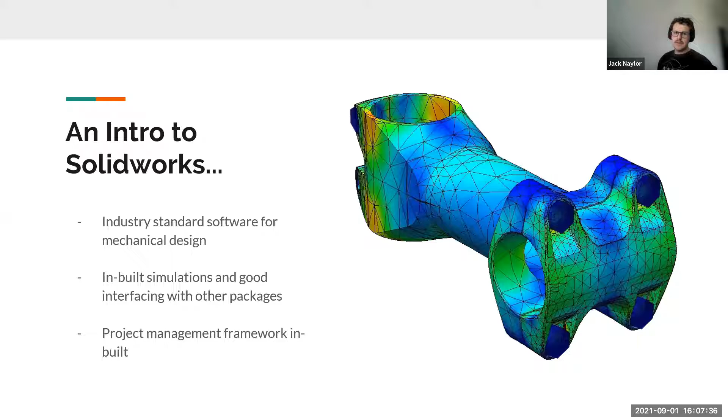Why do we use it? Why do we use SolidWorks over other forms of software? SolidWorks is a pretty good industry standard software for mech design. It's got some good inbuilt simulation and good interfacing with other packages as well. There's also a project management framework inbuilt to it as well. So SolidWorks is pretty widely used in that regard for doing CAD out in the workforce.

Just check chat. Cool.

So with SolidWorks, you're able to produce not only 3D parts, but also 2D engineering drawings. And that's pretty important in order to be able to make things; most manufacturers work off the 2D drawings. There's lots of toolboxes for plastics, sheet metal, computer-aided manufacturing, electrical routing, pipes, and all that other funky stuff that is quite hard to do by hand. So having a CAD program to do it for you is a really nice way of doing it.

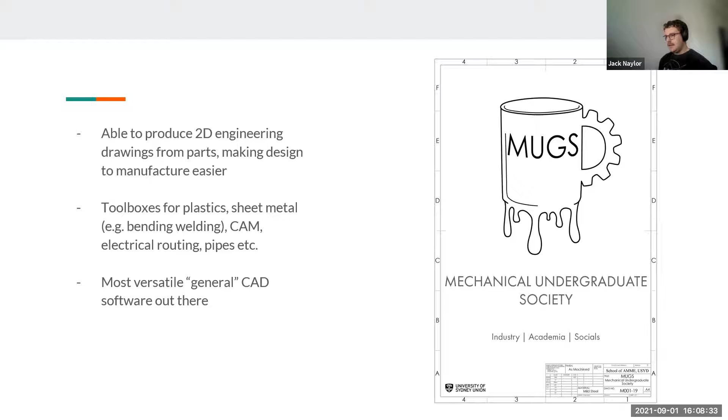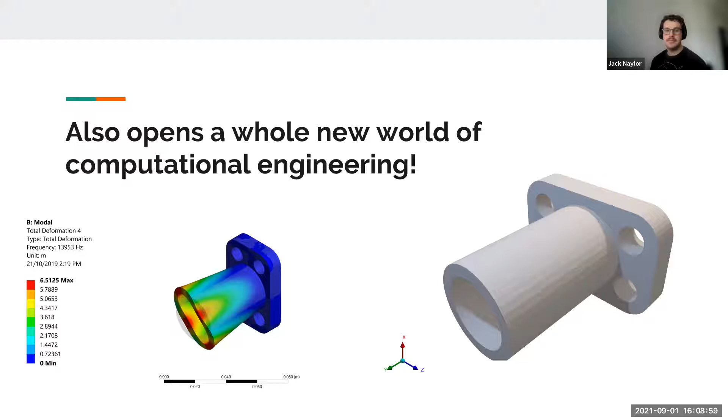I'd say it's probably one of the most versatile general CAD programs out there, but there's certainly some more specialized ones as well that are worth looking into. The other thing as well is it opens up a whole new world of computational engineering. So here we've got, for example, a part that I've made in SolidWorks, and then I've taken it over to a program called ANSYS that you'll end up learning in future years in engineering. In this particular case, it's showing off a modal deformation plot, but you can have it do all sorts of other things as well.

One of which is topology optimization, which is a really key and up and coming area. It's based on this idea that you start off with an original design and then you use optimization methods to go through and tear little bits of it off that aren't really helping the structural integrity of it. In this particular case, we have a funny angle bracket here with two holes in it. We load it with some forces on these two points. We run it through ANSYS and it actually generates a whole new model for us.

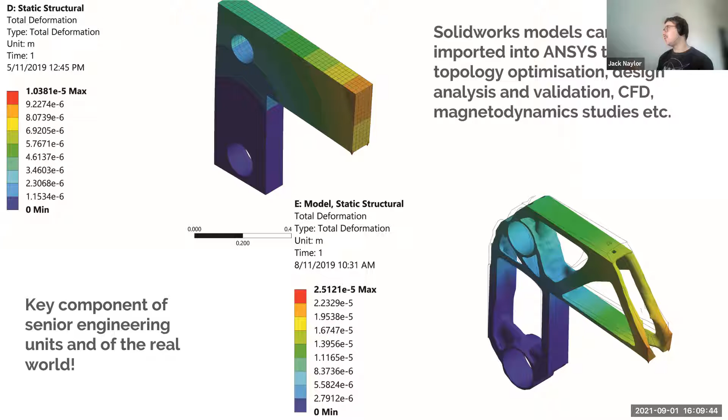So being able to design something rough initially, chuck it into one of these programs and then have it spit out a new model for us to use that we can then re-interface with other parts is actually quite important. And it's definitely where mechanical engineering is progressing towards in terms of actual product design and manufacture. Okay, so that's a broad overview about what SolidWorks can do, why it interfaces with other parts really well, and why that's important.

The next thing that we actually move into, and this is the core section of this presentation, is looking at what SolidWorks actually does to be able to build up a model. Having a fundamental understanding of this is a pretty key thing, and it will help you generate models going forward. So this idea of additive versus subtractive modeling. In order to build up a model, do we add bits of material to it or do we subtract that material?

And this is quite important when you're looking to build parts that actually need to be manufactured. The reason why it's important is the manufacturing techniques that we actually use in the real world look at both of these things. So for example, 3D printing is an additive process. We have a bed that moves around and a nozzle deposits bits of material, so it actually adds up to be able to build a structure.

Milling, on the other hand, is subtractive. You start off with a chunk of metal, it goes around with a cutter and gets rid of that material. Having an understanding of how those two are different and specifically targeting your design for one or the other can make it a whole lot easier to actually generate those parts.

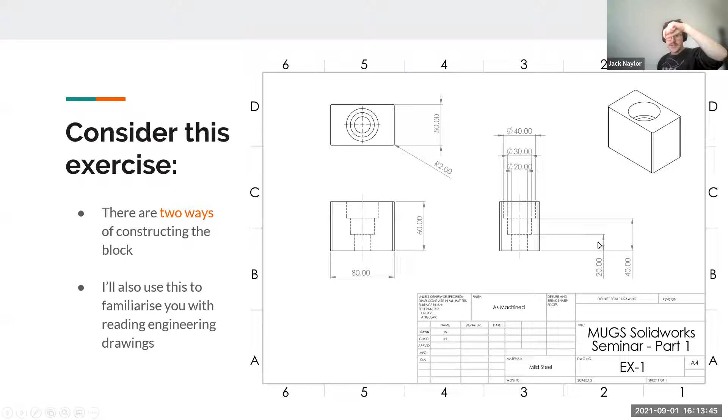And what I would do there is I would start off with a plane on the bottom. I'd build up this first layer here with that one hole in it up to 20 millimeters. Then I would start drawing on that next surface another rectangle with a hole in the center of it that's slightly larger, build that up to the next layer, and then build the third layer on top of that. That would be totally additive. I haven't done any subtractive processes. The issue there, of course, is that's kind of an unintuitive way to do it.

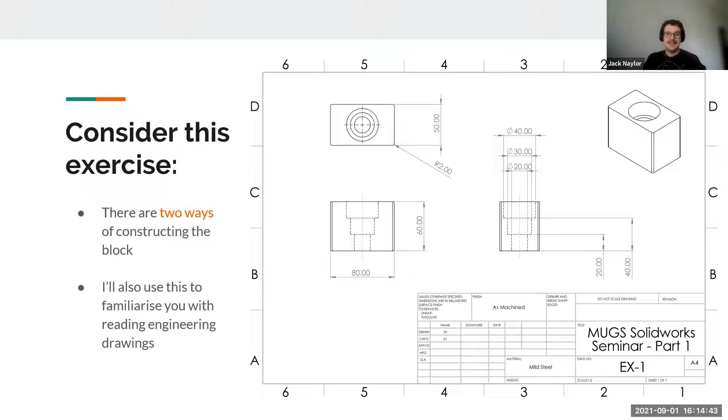The other way you could do it is you start off with a block, and this is the way that you probably would go about doing it. Start off with a block that's 80 by 60, and then you start subtracting out progressively these circles, going down with thinner and thinner diameters. And that would be a subtractive modeling approach to it. Obviously, that's probably much more natural to you. If you wanted to build this in the real world, that's the way you'd do it. You have a block of metal, you drill progressively down to take the material out. But yeah, that shows the two approaches that I'm talking about here, additive and subtractive modeling.

Another key thing that you should be thinking about is, what do I need to consider before I go about actually starting a model? Where do I start with this? So the first thing I would say that you should do is make a bit of a game plan as to how you're going to approach it, how you're going to start building it up and getting to that final product. So do you want to start with a block and remove material as we did in the previous example, or start with a base sketch and build things onto it? They're the things that you should be considering.

The other thing that you want to do is get a bit of an idea for the proportions of the part. So you'll have a drawing in front of you. It might have a range of holes in it and fillets and all sorts of other things, but getting an idea for how big they should actually be in relation to the other parts is quite important as well. It gives you this intuitive check as to whether what you're actually building is indicative of the real thing.

The other thing that you should do as well, and this is something I want to stress, is you should look for symmetry in your part. CAD programs allow you to mirror things, and this makes your job much, much easier than it would be having to go through and build everything in a model. If you can see a line of symmetry in your part, well, that's going to be a whole lot easier for you to actually build up.

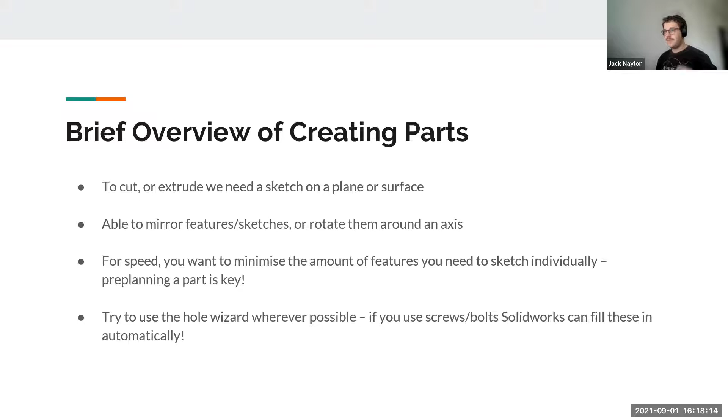The other thing is when you have holes in your parts, you want to use the hole wizard wherever possible. And the reason for this is SolidWorks is able to fill those holes in with screws and bolts. And that makes your job a whole lot easier. If you go through and want to generate a bill of materials for your part, it can actually put in how many screws you want in the end. And it just makes it a lot easier when you go to building assemblies, having it kind of rooted in the real world with what the fixtures you would use would be.

Something that's quite key that I think anyone that is new to SolidWorks should be aware of is this concept of reference geometry. This is here to make your job a hell of a lot easier. It basically allows you to start creating features off of surfaces to join later. So you can apply geometrical constraints and use them as your kind of baseline. So you can create a plane that's 10 mil off a surface and start sketching on that to extrude down, for example.

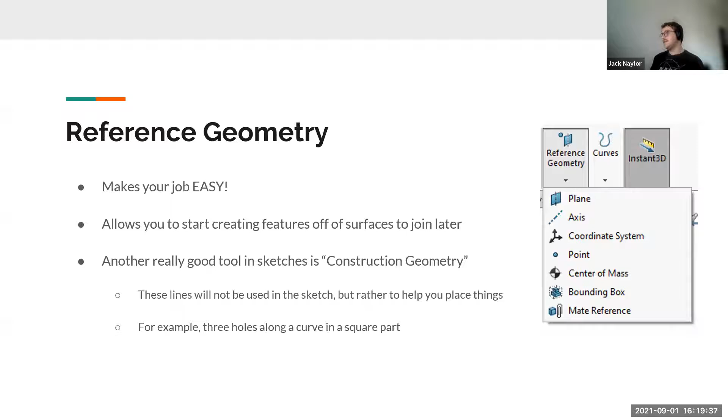The other really good thing is this idea of construction geometry as well. So when you're in a sketch, you start drawing up the geometry that you actually want to use as a component of that sketch, but you can also lay out other parts of geometry that are just there to help you construct and place things as well. Now, what do I mean by that? Well, these could be 3 holes on a square part, each a radius from one of the corners. So in this case, I have my 3 holes here. I've drawn them and you can see that they're this solid black color. And that indicates that they're actual sketch features.

But I've also then clicked on my arc here that I've drawn from this point at a radius. And I've clicked this box called for construction. Now, what this means is when I go through and start either extruding or cutting these holes, they're the only things that SolidWorks will actually see as features for the part. It'll ignore having to cut through that line or whatever. That for construction line is just for construction. It doesn't actually go through to the real part. So being aware of that and using that to your advantage is quite important.

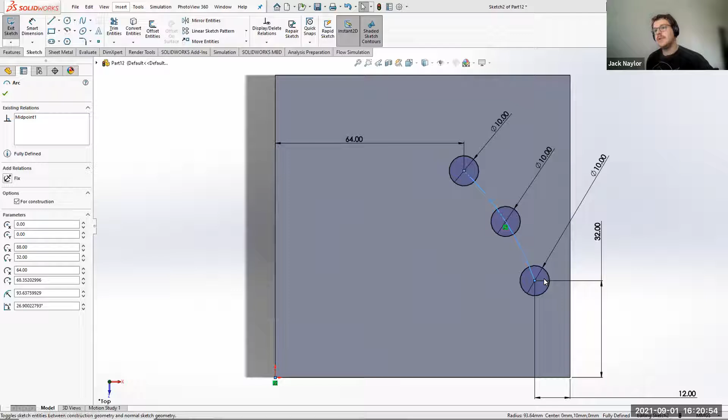You can see that with a lot of the constraints that I've put here, I'm able to fully constrain this middle circle by only dimensioning these 2 outer circles. And I talk about what fully constrained sketch geometry looks like in a moment's time. The other thing you can do is, rather than just having a 1D piece of geometry, as I had in that arc before, you can have a 2D piece of geometry.

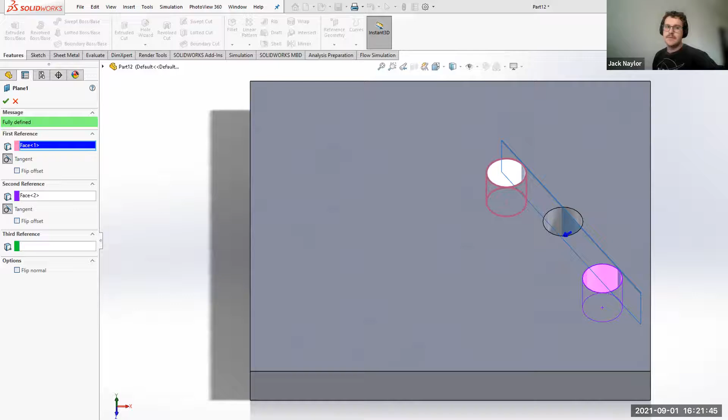So in this case, I've actually put a plane that is tangent to these two holes in my plate, but cuts through this third one. And how have I done that? Well, I've said to SolidWorks, I want to input a plane here. I want it to be tangent to the first one, and it goes, okay, cool. And then it goes, all right, where's the second reference, the second face of this hole? It's also tangent there. And so it can fully constrain that plane to be tangent to both of those. And that's kind of an indication of a more 3D version of construction geometry, reference geometry rather.

I mentioned a moment ago about sketches needing to be fully constrained. Now, what do I mean by this? Well, SolidWorks is only able to do what you tell it to do. If it doesn't have enough information, it's not really sure where you want to place something. So there's three types of sketch definitions. There's under defined, which is when something is blue. There's fully defined, which is when it goes black. And there's overdefined. And there's two sorts of overdefined. Red, which is unsolvable. You've given sets of geometry to SolidWorks that it just can't solve, and yellow, which is

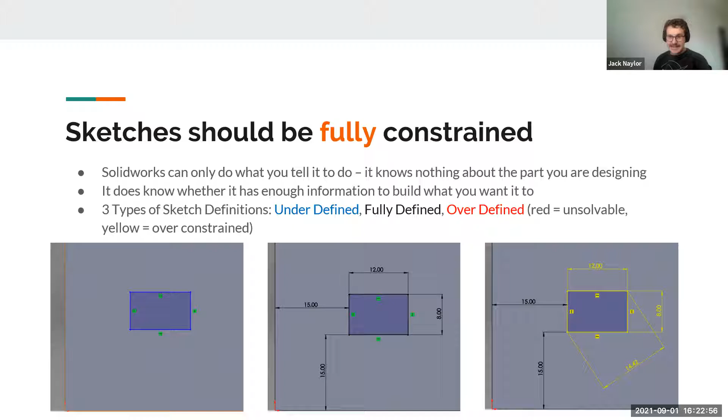overconstrained. So an indication of overconstrained that I have on the screen here is a rectangle that I've put in. I've dimensioned both its sides, but then I've dimensioned this diagonal. And so it's not really sure which one it should pay attention to, whether it should look at this top side here or the diagonal in that case. And the good thing is, because they're different colors, you can work out where they are pretty easily and go about correcting them by deleting dimensions or adding new ones in to fully define.

Another thing is geometrical relations. And we'll get to this when we do an example in a second. Now, geometrical relations are inside of a sketch part, and they're indicated by these little green boxes here. These are really, really handy, and it allows you to relate parts of geometry in your sketch to one another. So in this case, this vertical line has a symbol that it's vertical. This horizontal line has a symbol that it's horizontal. And what that means is SolidWorks knows that that line is constrained to that horizontal fashion or that vertical fashion.

You can also add things like coincident, where you have a line intersect another curve. It creates a point that is coincident on that curve. You've then also got tangent constraints. So you have a line that is tangent to a circle. And you've also got things that SolidWorks might generate automatically for you, like a midpoint constraint. So if you click to put a line between the center point of this edge and that circle, it'll add a midpoint constraint automatically, and also things like a rotational symmetry. So there's quite a few of those inbuilt, and they're really, really handy. We'll kind of show them off in a second.

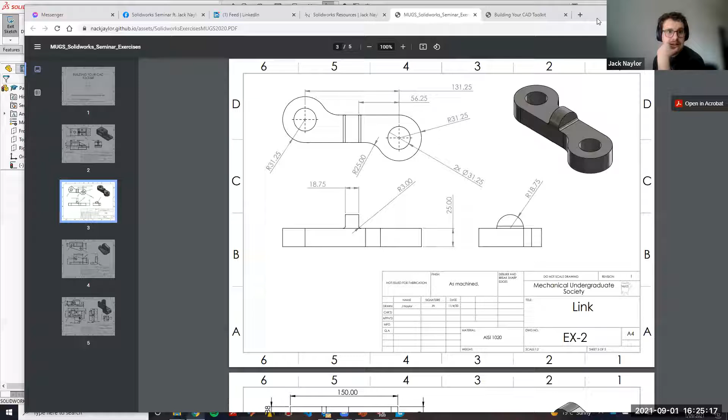There's a PDF there. We're going to actually go through, and I'm going to give a live demonstration of how we actually would go about making a part by looking at some of these constraints. And you guys are welcome to follow along in the background as well. So just give me a moment to exit out of that and bring up my dimensions on this screen. So I suppose first thing to do is to look at what the actual drawing is showing us here.

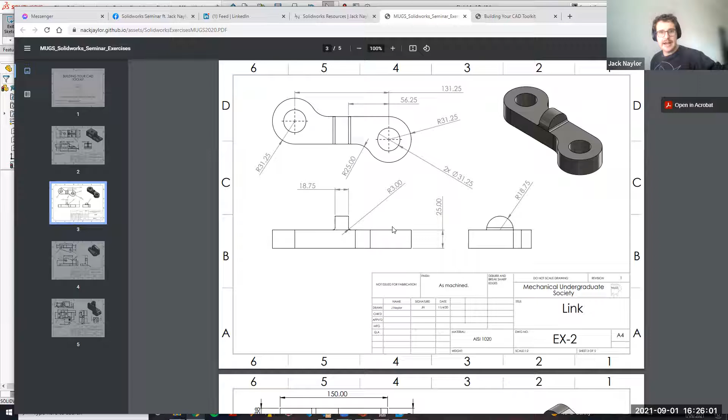Okay, so we've got this funny looking part. We've noticed that there's a number of dimensions here. So when I'm talking about pre-planning, I'm thinking, okay, that's probably a good base point to center everything to start off from, because I know that I can constrain a number of my features around that. We've also got this funny bump on top that looks like it needs to be constrained from the horizontal side. So I probably need to put in some reference geometry to be able to do that, probably in the form of a vertical plane that I offset. And that's obviously got a radius that corresponds to that width. So that's something to be aware of as well.

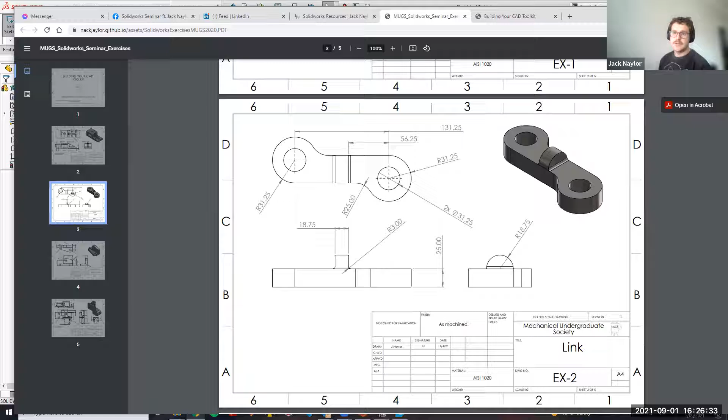And a couple of fillets as well around the part. So these are all things that you've got to be aware of. But I think this center point here is definitely a good place to start. And I notice that this entire profile I can probably do in one sketch entity. I don't need to go through and do multiple sorts of features. So, okay, let's have a go at that now. I've already got that center circle put into place. And I note that that's going to be a diameter of 31.25, like so.

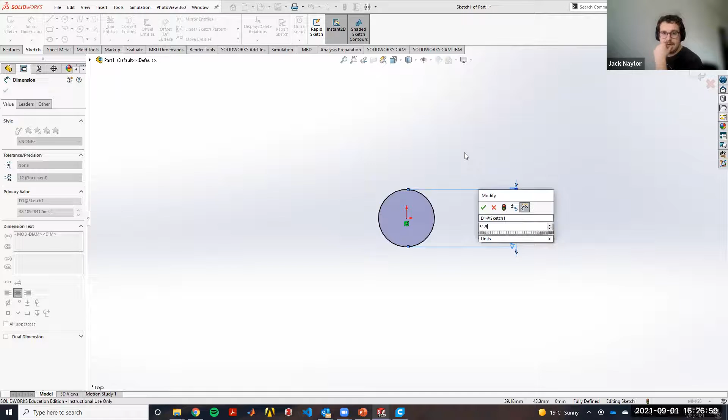And wait for this to load. Okay, 31.5. All right, so there's that first circle in.

The next thing I want to do is put another circle around it, corresponding to the wider part of that chain link. So let's go ahead and add another circle in.

Now this one needs a radius dimension, and I can dimension from here out to there, like so. Oh, interesting, it won't let me. It's all right.

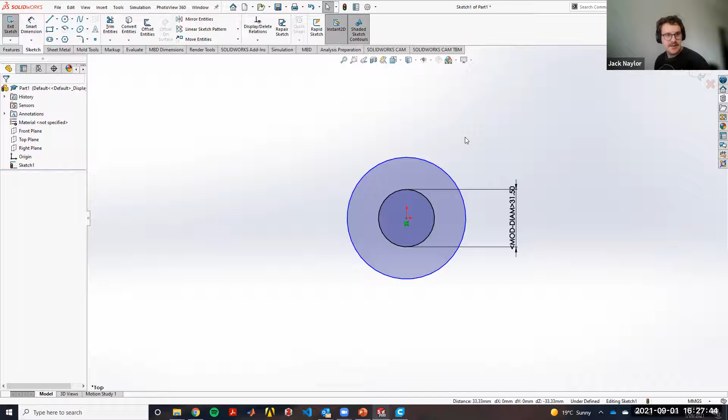It's okay, we'll click off the circle once more. Okay, that's worked that time. You'll probably see that I'm not actually clicking this dimension button. In my case, I've bound the dimension button to the D key on my keyboard, which I think is quite intuitive, but it's certainly personal preference. You can keep clicking up to the dimension in your case.

So in this case, that circle has a radius of 31.25. Times that by 2, that's going to be 62.5. Last time I did maths. Wait for that to load.

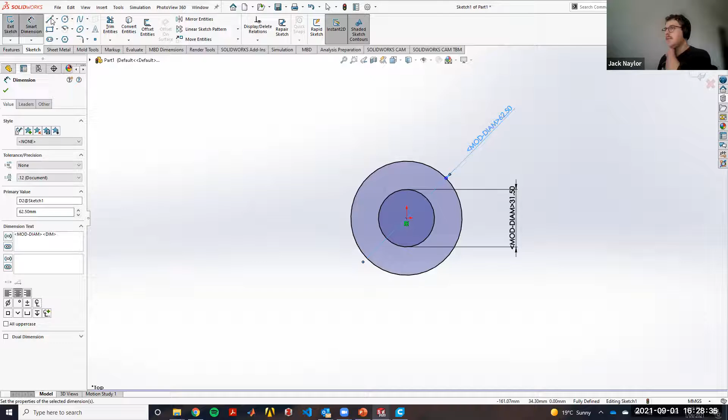And the next thing we want to be looking at is that top horizontal line. So we'll click the line. Now we know that's going to be tangent.

So I want to come down here. I'm going to click the top of my circle and create a horizontal line like so. That's going to come across.

And then I also want another line beneath it. Let's go about, and this one is not going to be tangent, it's going to be horizontal.

So this is where we might want to add in one of our constraints. You'll see that SolidWorks is clicking here to that horizontal constraint. If it doesn't, you can always go over to the side and click on the line and add in that horizontal relation. But in this case, it's done it for me.

Okay, that's our left section almost done, not quite there yet. The next thing we want to do is start getting the circle going on the other side over here. So let's draw a circle.

Our inner circle is going to be a diameter of 31.25 again. We'll come down, dimension that, 31.25.

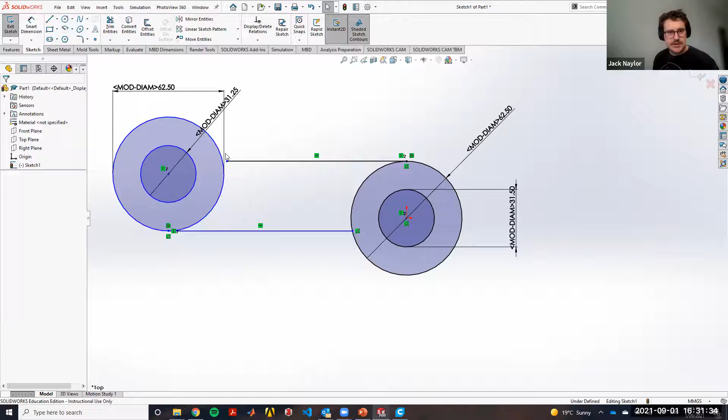What we now want to do is drag this such that it's coincident onto that curve, which is just done there. We also want to drag this one across a little more, and that will also add in a coincident constraint.

So, okay, this is now taking shape. The next thing we want to do is dimension where the center of this circle is relative to this first one. So let's go ahead and do that. I want to click the center of this circle and the center of this circle, like so. And that gives me a dimension between those two.

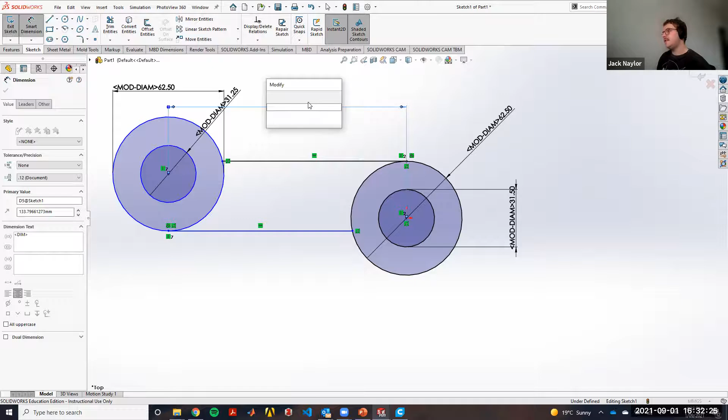And I should now be able to edit that dimension, which in this case is 131.5 millimeters. All right, that's now brought that in slightly.

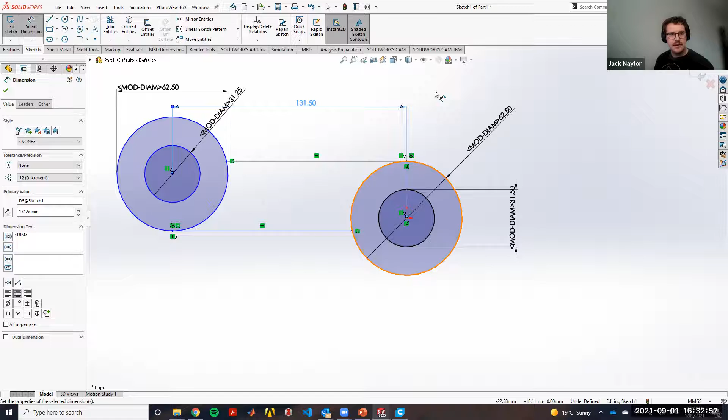The next thing we want to look at is adding in the radius between my left hand circle here and this line, and between my bottom line and my curve here. So I think from memory, the way we go about doing that is adding in a sketch fillet.

And I want to hold Control, Enter, or click between these two. Oh, hang on, no, I think I need to click this.

Oh, great. That's all right. We'll add the fillets later.

The next thing we want to do is apply the width here, which is a radius of 18.75 times 2 - handy thing to have is a calculator, of course. 18.75 times 2 is 37.5.

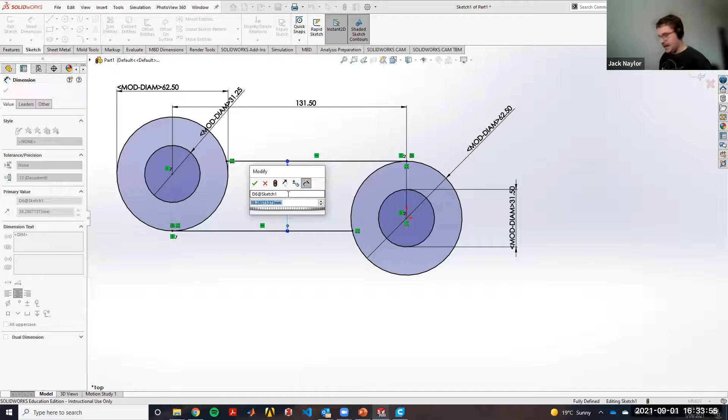Okay, we've now got our rough shape pretty much, bar our fillets there, but I think I can do them later. The next thing we can do is trim some unnecessary parts here, and that gives us the rough shape of our linkage.

All right, so now we've made our sketch. The next thing we want to do is go through and make this into a feature. So in order to do that, I'm going to be extruding it, building up my part.

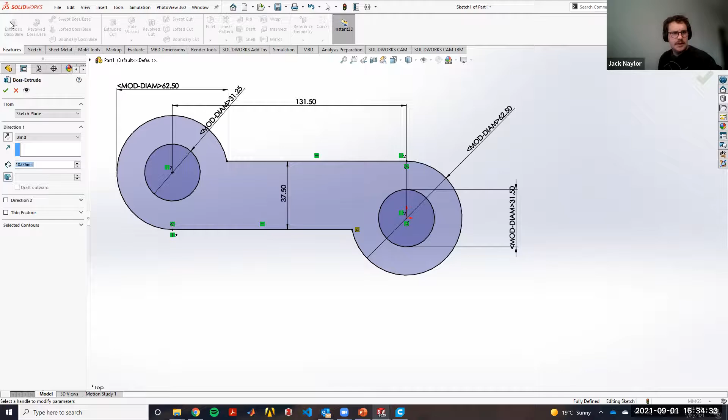I open this. It's already selected the largest area for me, which is nice. And I want to extrude that blindly up by 25 millimeters. So that's doing that just there.

Okay, so now we've got our linkage there. I'll try and add those fillets in for the moment. So they're 25 millimeters, I believe.

I can click that line in there, and then this line in here. And that's going to add in both of those curves, like so.

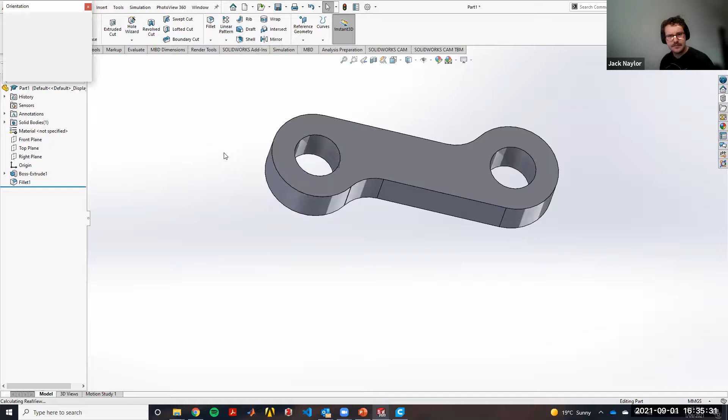The next thing we want to do is add that funny bump on top of our linkage. Now, in order to do that, this is where we're going to need to use some reference geometry. So let me just rearrange my view slightly.

In order to add in reference geometry, we come up top here, we click plane in our case. Now, I kind of made this easy on myself because I chose to start that first hole at the origin of my part. So what that means is that my right plane actually cuts through my part, which is quite nice.

So in this case, I need to make sure that my little bump is 56.25 millimeters in that direction. So what I can do is I can basically put a plane there that I can start drawing on. So in this case, 56.25 - this is currently going in the opposite direction.

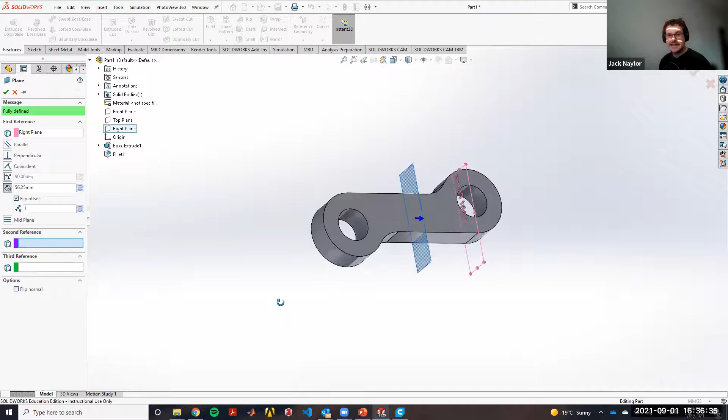What I can do is flip that offset and it will put a plane in the very center of my part, right where that bump needs to be. Okay, let's add that plane there. So our plane is sitting there nicely, make that a little larger.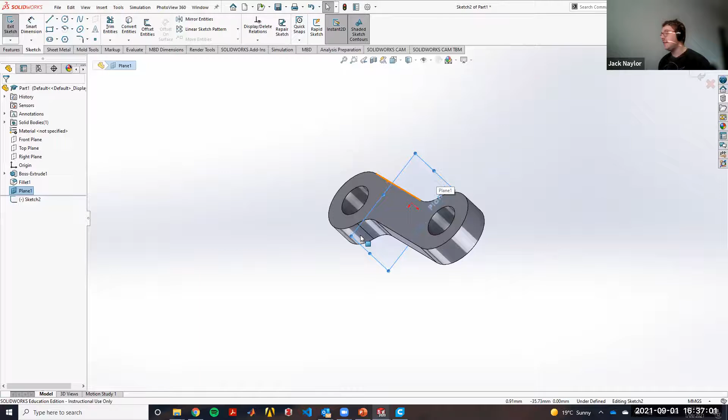Then the only thing we need to do now is add a semicircle. So we're going to click sketch, and I clicked on the plane before, and that means that my sketch is automatically entered to be on that plane. And now I can switch to an end view, sit over here, and just add in a semicircle.

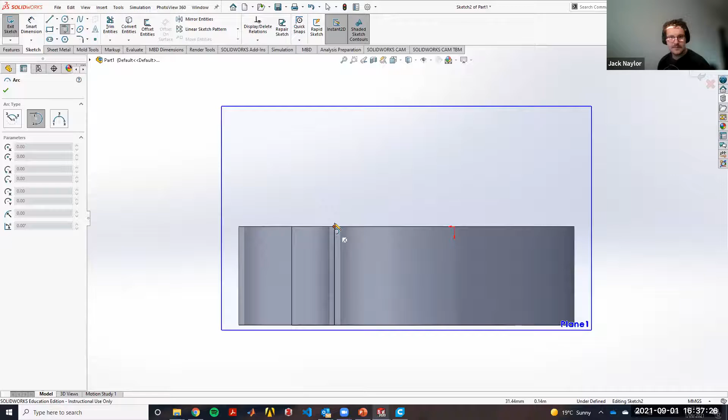So the way I'm going to do that is I'm not going to do a center point arc. I think I'm going to do a tangent arc. I'm going to click here. Oh. Actually,

let's do it via a circle. That might be slightly easier. Oh, why is that? Okay, now we've got a circle. Cool. Draw that out like so.

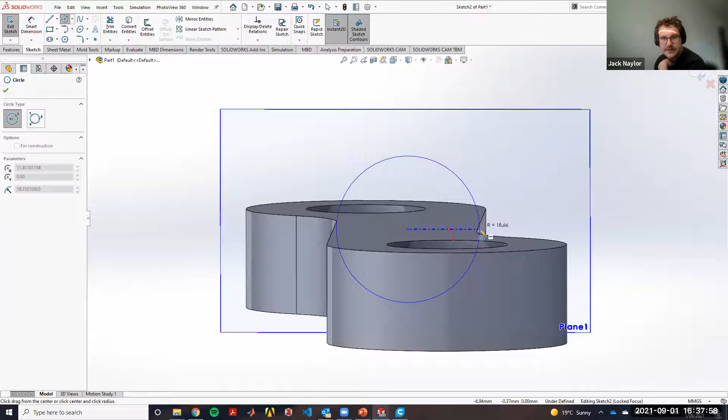Now, in order to dimension it, select that end part once more. And you notice that it's slightly off. So what we can do is add some constraints in.

I'm going to click the outside of my circle. Then I want to click this line of my part, hit Control. And the other thing you need to do is click this surface and do what's known as convert entities.

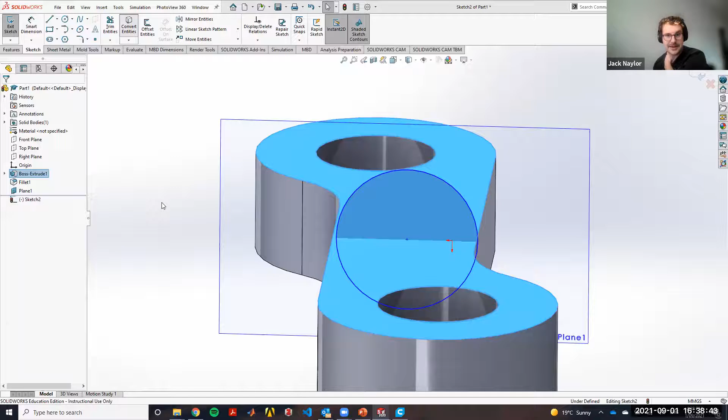And what that does is it takes, oh, that's annoying. I said to Nick before that it would get up to this point and things wouldn't work for me. That's all right. I know what this needs to be.

That needs to be a radius of 18.75. So if it's a radius of 18.75, it's a diameter of 37.5. Like so.

We can put in a line that goes from this edge here using a coincident constraint over to this other edge here, like so.

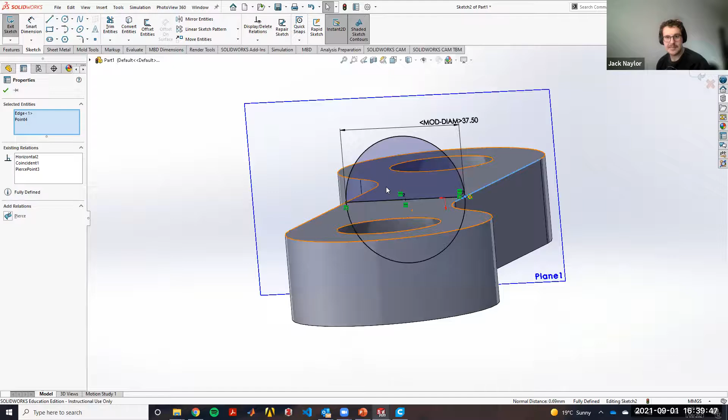Click that point and that line and add a pierce constraint, and that's now fully constrained. So my semicircle is now sitting where it needs to be. The next thing we can do is trim the bottom of our semicircle because we don't need it anymore.

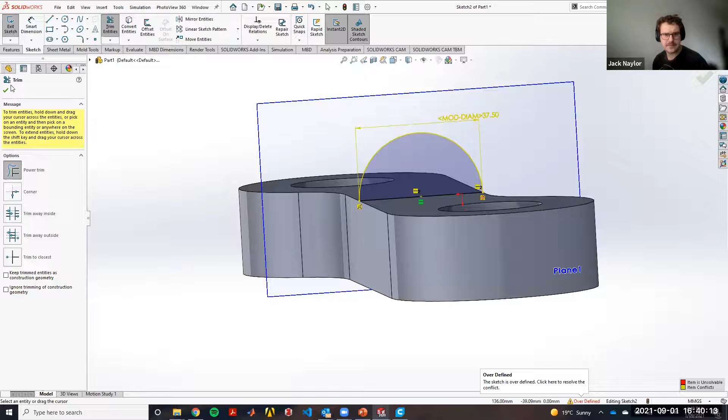So go to trim entities, go there, and our sketch is now over defined. Okay, so that's all good. We can just remove that dimension like so, and now our sketch is happy. You'll notice that we've defined that now without actually having to add any dimensions in.

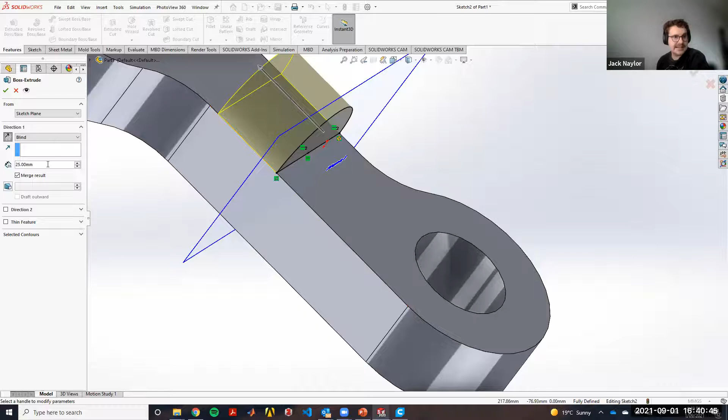So what's the last thing we need to do now? We need to extrude it. That's going towards this end here, we don't want that, we want it to go in the other direction. So we're going to click this reverse direction button, and we'll note that it's 25 millimeters long. Okay, click OK there, and that should generate nicely, like so.

Very good, that plane, we're now done, we don't need it anymore, so we can actually hide that. If you click on it, mouse over your plane, there's a button here that says hide. Click that and it'll go away.

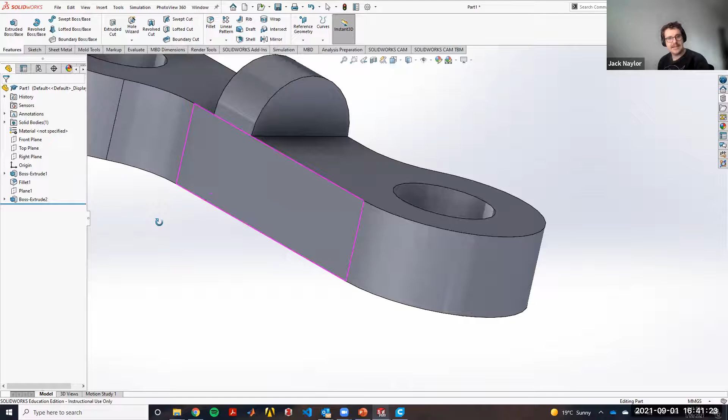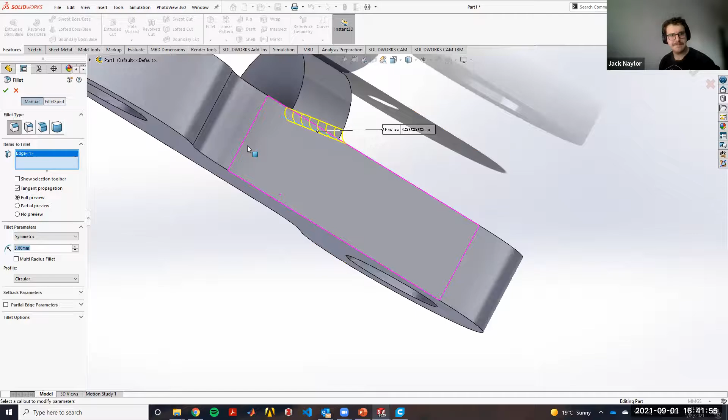The very last thing we need to do is add a 3mm fillet to the sides of our little bump here. So we go up the top, we click fillet, and we now want to fillet these two edges, and just like so, cool. We're going to add in 3mm because that's how long our fillet is going to be. And we then want to click these two edges like so, and that should be us done.

The last thing you always want to do is compare it with your drawing. So in this case, there's our part, there's our drawing, and that looks pretty good to me. What this says is we've gone through and reconstructed it to the best of our abilities from all these dimensions in 3D. So that is kind of how I would go about making a part.

It was probably long and tedious, but I think it's quite logical, particularly if you're just beginning with CAD, to see how someone goes about approaching a part and building it up from scratch.

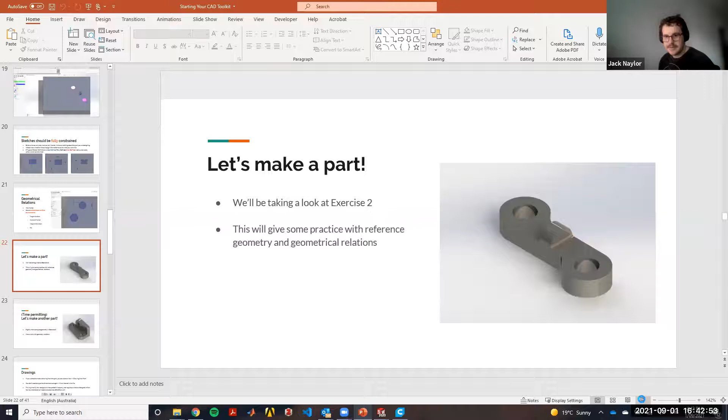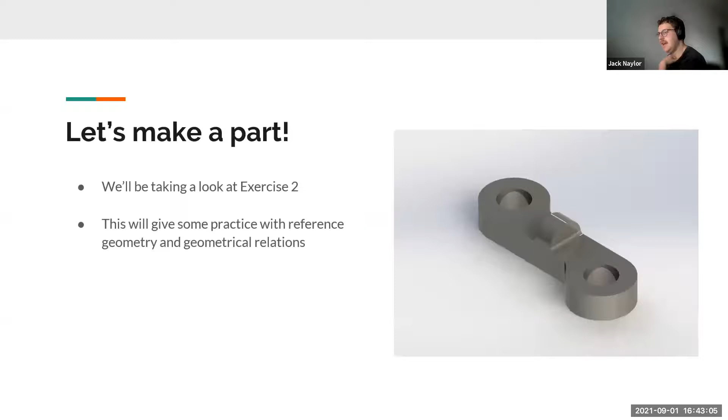So we are not going to do the second part because, as usual, it takes a lot longer than I expect. Let me just swap these two around. The next thing we are going to do, though, is we are going to look at assemblies.

Well, I suppose the last thing I want to talk about is that was building something in 3D. Obviously, when you build up a model, you probably want to produce a 2D model of that as well. So how do you do that? You go up the very top of your screen and there's a button that says make drawing from part or assembly. That then takes you into SolidWorks' 2D drawing suite, which allows you to create a drawing from your part such that you could give it to someone else and they can take the dimensions and try to recreate it for themselves.

The good thing about SolidWorks is you don't need to type all the dimensions out again, they're already stored in the model. So when you go through and dimension something in a drawing, it's actually drawing those dimensions from your initial part, like so. This is how designs are interpreted in the industry.

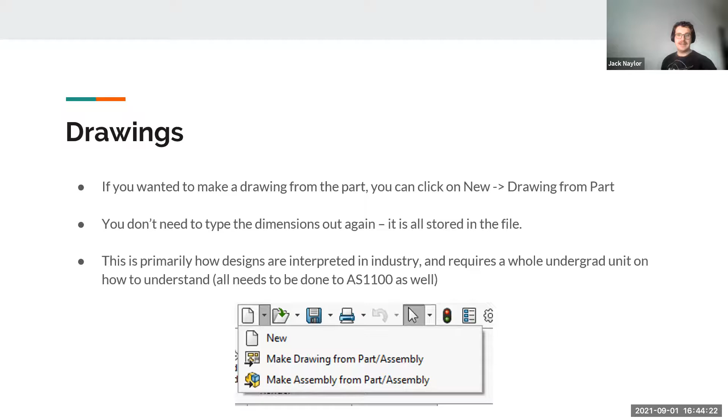It basically requires a whole undergrad unit on how you generate these drawings, which is what Mech 2400 is. It's quite important that you understand how you can take things from 3D to 2D to then have someone build a 3D part for you.

Okay, so the next part of this seminar is looking at assemblies. We've generated a part, now what do we do with it? Essentially, parts can fit together into a final product called an assembly, and this allows us to virtually reconstruct the part. It allows us to see how it fits together in a 3D model. We can check things like tolerances and interferences and whether we've actually modeled it correctly. And then we can also do some fancier stuff as well, like performing motion studies.

So the good thing is it's basically like Lego. Each part is a block. There's mates in an assembly that allow us to push them together and hold them in place. We can add pins for bearings and joints, and we can basically play with our design as we go along to make sure it all fits.

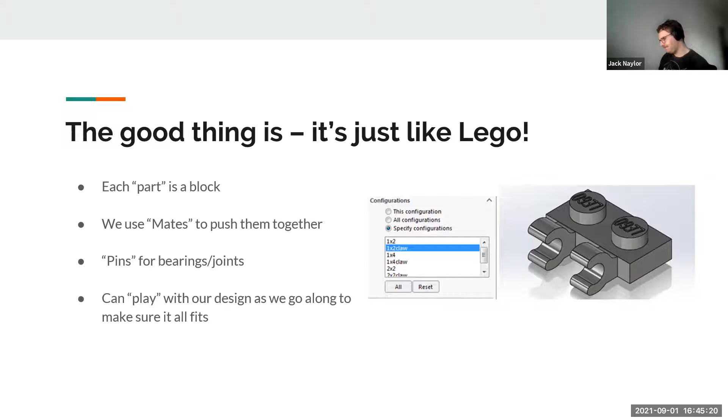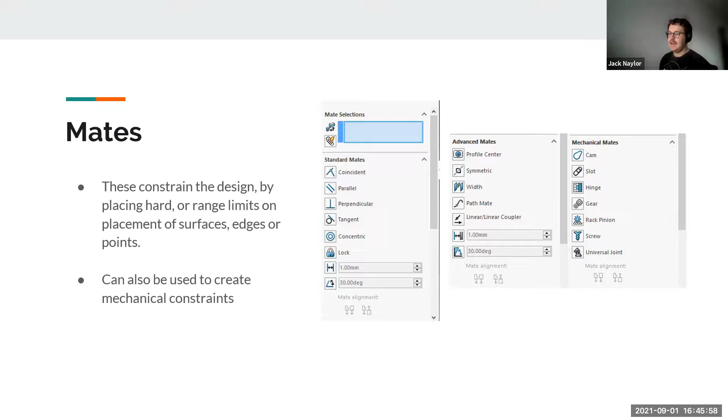So those mates I was talking about constrain your design. It places either a range of limits on the placement of surfaces, edges, or points, or it imposes hard constraints, so things need to be located where you describe them to be. It can also be used to generate some mechanical constraints, these ones sitting over here on the side. So if you actually have a model that you want to see working in real life in SolidWorks, you can add those in and have it move as it would in the real world.

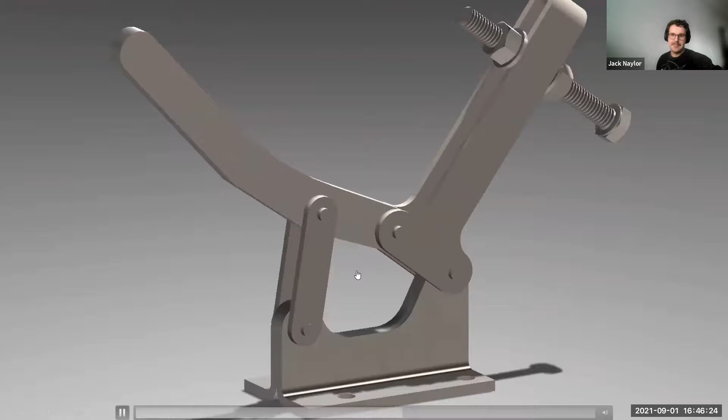So we have a lever arm. We have here some pins that we're going to be hinging off and using as bearing joints. We've also then got this funny bit at the end, which holds the part that actually clamps. You can see that this is kind of a relatively complex mechanism, but you'll realize that it's pretty easy to put together in SolidWorks, which is quite nice.

So, okay, how are we going to go about doing this? Well, on that website, should be in the chat still. If not, I'll add it again. There's a link to download the assembly files. What you want to do is unzip the folder, open the clamp unassembled file in that folder, and that's got all the parts already sitting in there. So you don't need to import them. All that we need to do is assemble them together.

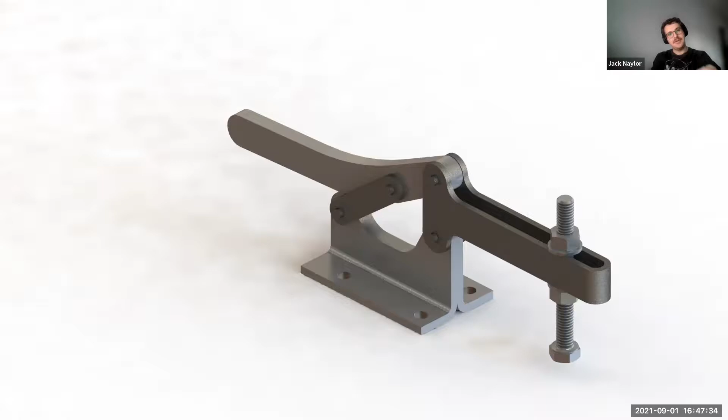So I'll give you guys a second just to look into that and make sure you've got it opened. In the meantime, you can look at this very nice rendering of this clamp, like so. I'll give you guys maybe 20 more seconds to get that opened and ready. And I will also go through and open my clamp unassembled. Okay. So here are all our parts. They're all sitting in there nice and ready for us.

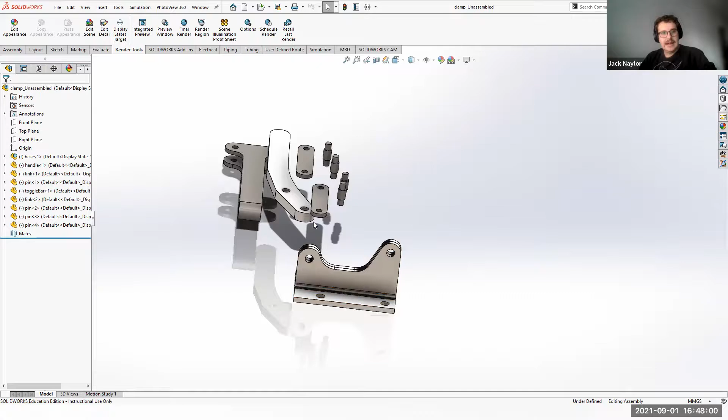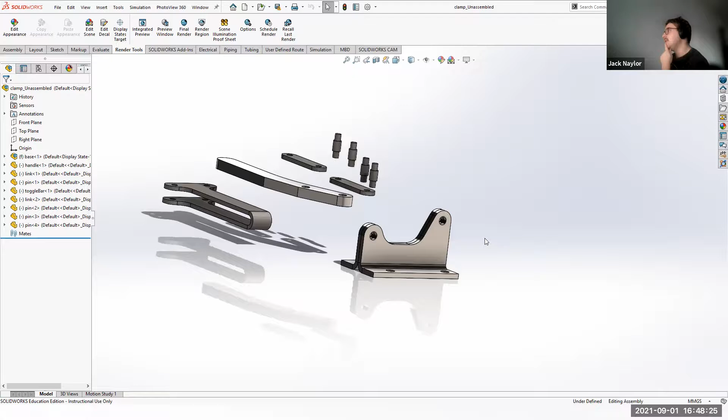So how do we go about putting it together? Well, again, like with a part, you kind of need to have a plan for how you're going to go about doing this. So when I look at my diagram of how this fits together, I can see that we have some pins in this bottom bit for starters. We then have pins in our handle, and then these sheet metal parts kind of slip over the top. So that's how you go about doing it in real life as well, right? So all we need to do is replicate doing that in SolidWorks. So how do we do that?

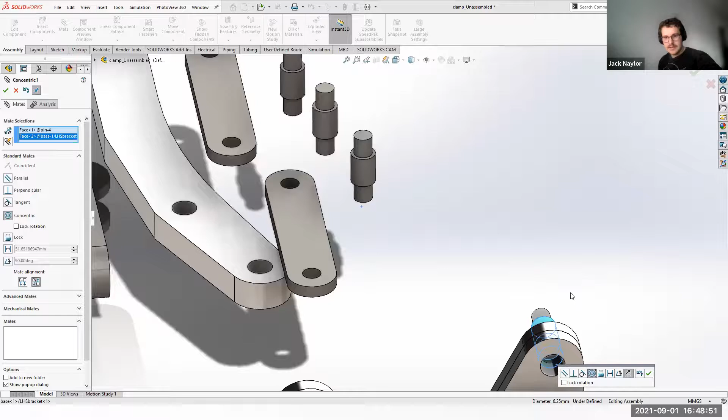Okay, we go to the Assembly tab, we click Mate, and we can go through and add some of these pins. So I want this larger part of the pin to sit inside this hole, and SolidWorks is going to move it over there and slot it in that hole for me. The next thing we want to do is make sure that this end surface is flush with this surface here. And SolidWorks has gone and automatically done that for us as well.

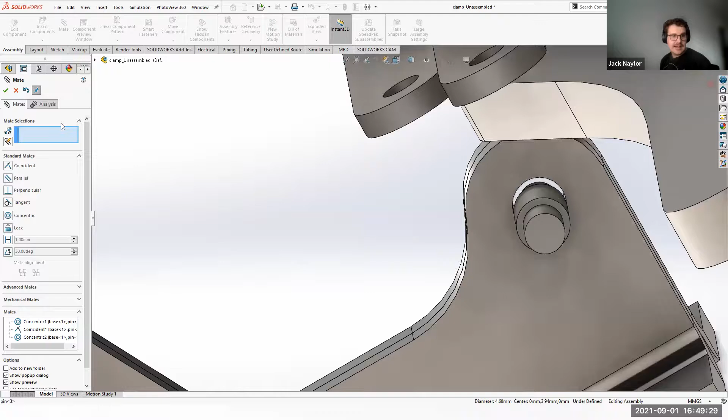So we just need to now keep going, keep putting our pins inside, and make sure you click on the surfaces. If you don't, you come over to the mate selections, just hit delete on your keyboard, then re-click in the box and click a new surface. And that's now our second pin in our base.

All right, the next thing we want to do is add these in the handle as well. Like so. Make this flush, and make those two coincident. Add this in. Okay. Add that, mate that. All right. And now all our pins are inserted.

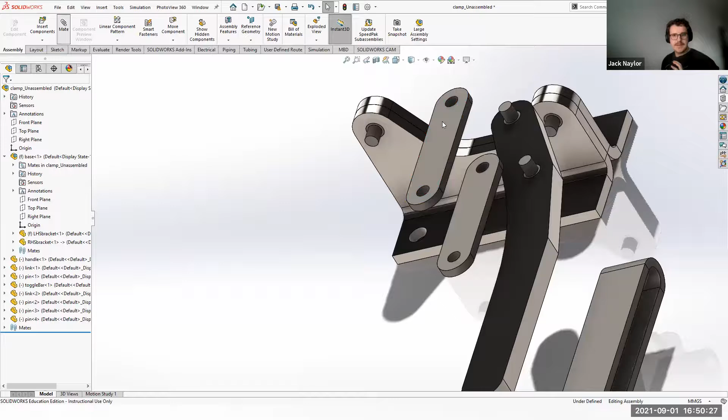All right. The next thing we want to do is these two bits here, these kind of side mechanical linkages, they look to sit over the top of our pins down here. So let's go put them in next. So I suppose we know that they're going to be flush with this side here. So we can go through and make sure that those two stick together. And the next thing we want to do is make sure that the linkage hole lines up with this part of our pin. So we can go through, add a constraint there, and that's sitting where we want it to.

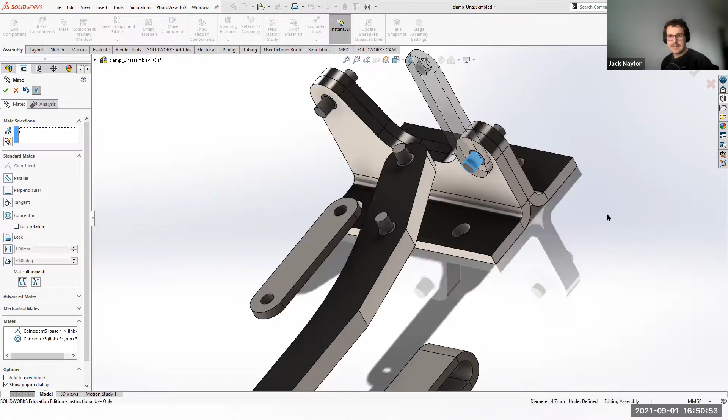We then want to append this other one, obviously, to the other side. Click over there. We then want to go through, make sure the holes line up. So click the hole, click our pin. They're now in the right place.

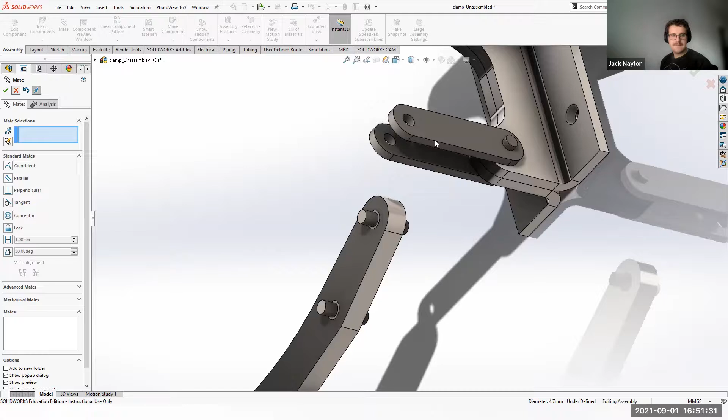Kind of a key thing that you should consider at this point, and I'll just exit out of the mate menu for a moment, is that these two parts of the linkage aren't currently joined together. So they can move independently of one another. This will be quite a common thing when you're working with some relatively complex assemblies. And so the way you go about fixing that is you add a constraint between some of your moving parts as well.

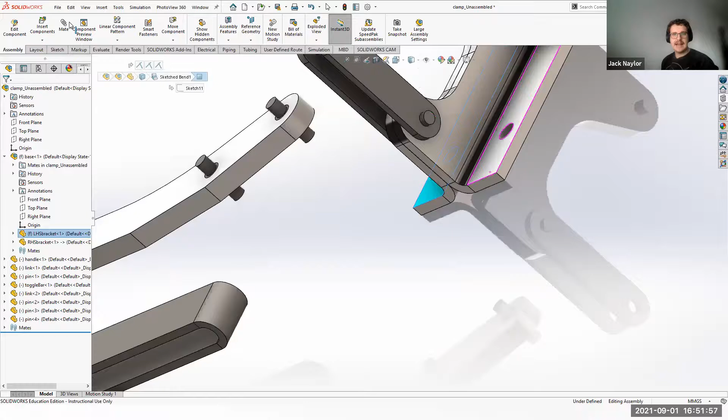So to kind of show that off, I can move this linkage, and you'll notice that the other linkage behind it isn't really moving at the same time. That's all good. Let's add a mate between these two back edges of our linkages.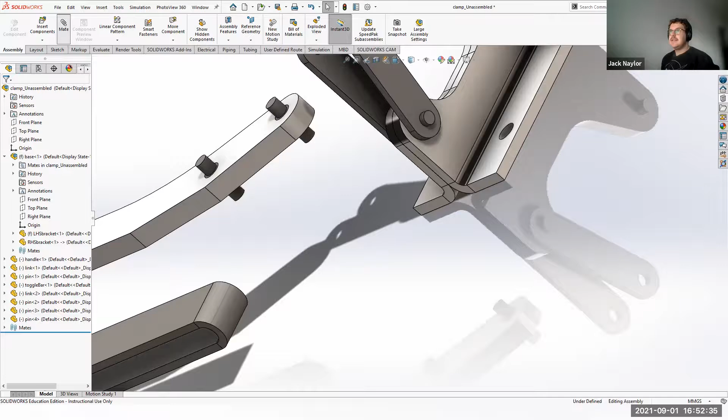I really hope my computer isn't freezing. I am just going to exit out of that real quick. Okay, cool. Switch over to SolidWorks.

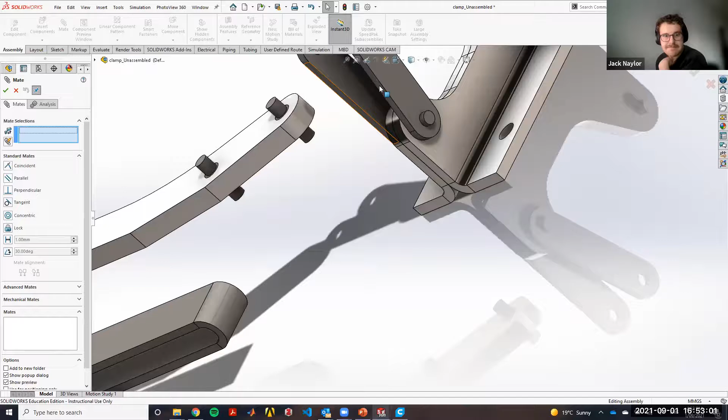All right, we now have our mate menu up, our mate selections. We're going to click these two parts such that they're coincident, which is good. All right, the next thing we want to do is, we've obviously got those side linkages in. We probably want to now constrain our clampy bit onto the end. So how do we do that? Well, as we've done before, click inside one of our holes and click on our pin.

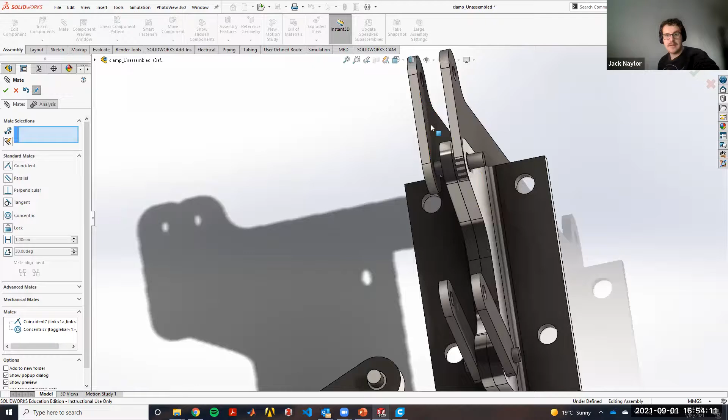And you really do get the feeling now that this is exactly like Lego, right? It's pretty much just taking your bits and pieces, adding them together and making sure everything is well constrained. So, okay, that's now sitting concentric. You notice that we have two holes here. There's really no need for constraining this other side concentrically as well. But what we do want to do is constrain the side part of this toggle bar so that it sits flush with the outside of our base part, like so. All right, that's now in.

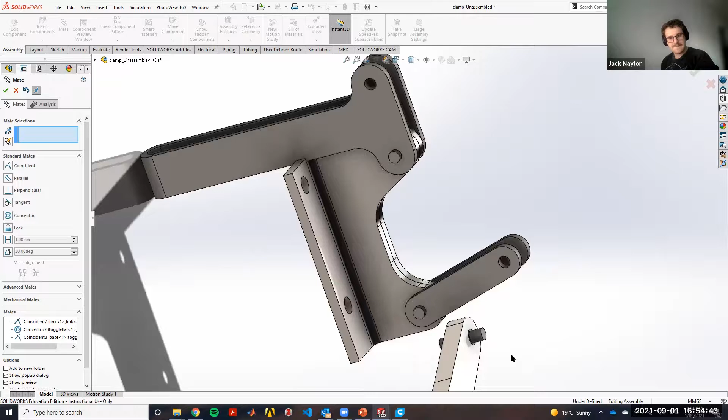The next thing for us to do is to finally add on our handle. So we need to make sure that we're getting this the right way around. Let me just zoom out. Okay, so the really long part of the handle needs to sit over on this end. So that means that this pin needs to fit in these holes here. So we go through, we click our pin and align it.

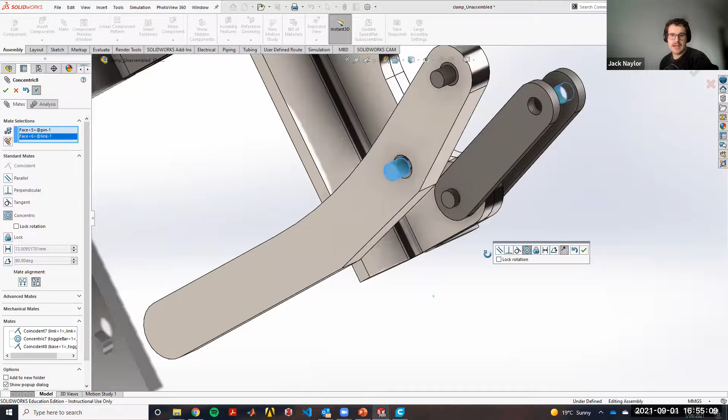In this case, it looks like our mate is going to be misaligned. So this is quite a common thing. It's no worries. All you need to do is click the mate alignment and it will flip your part around to rearrange that mate. So, okay, those two are now concentric. I can accept that mate.

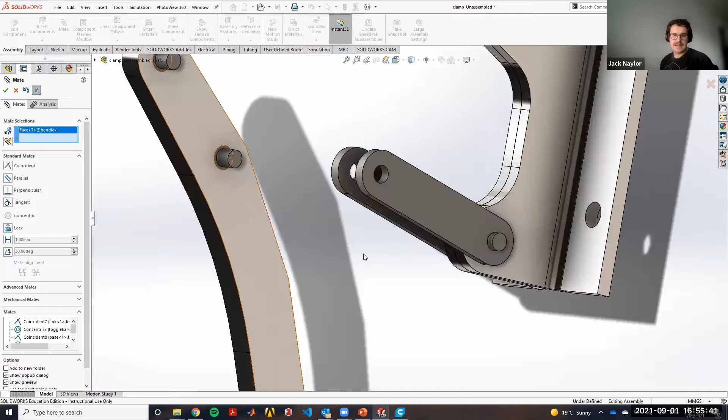The next thing we want to do is slide this over so it sits in between here. So we're going to do that by clicking this side and then clicking the inside of these linkages, like so. And this will shift it over so it sits in nicely there.

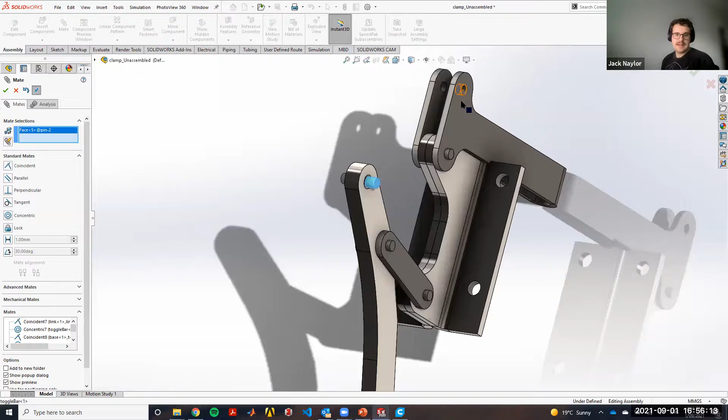And the last thing, the very last step, is to make sure that this pin fits inside our clampy bit at the end. So that's not a problem. We just click and click again. And that should be our part fully constrained. So, okay, very good. We can exit out of the mate menu.

And we can actually actuate this in the assembly, and you can see how it operates. So how do we do that? Well, we grab the end of the handle, obviously, and we can move it around. And we can see that this is now working much like the video I showed you earlier. So that's good. It means we've assembled it correctly. Nothing's breaking. We haven't fully constrained this.

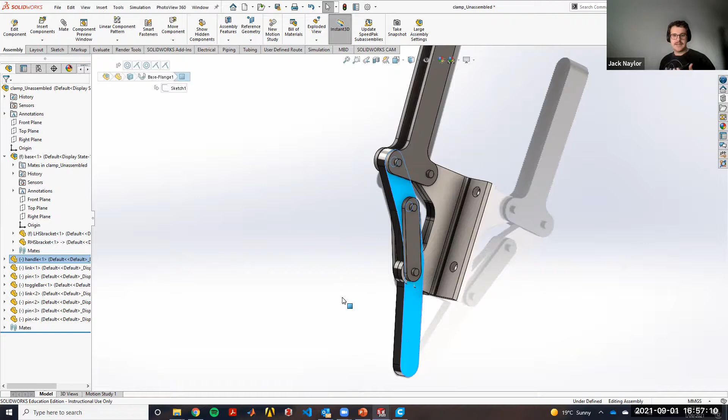And this is kind of more of an advanced type thing that you might do in industry. You see that my handle actually passes through. You can add things like angle constraints so that this won't do that. And you can add mechanical constraints so that this handle will actually physically interfere with this base part. But we don't have time to do that today, unfortunately. I'll leave it as an exercise to the reader, as they say. Cool. So that's the assembly all done.

You can complete that in your own time, as I am conscious of the clock. The last kind of little thing, and I've added this in for this year, is how you would actually go about manufacturing a part that you've made. And this is quite, I suppose, a relevant thing. So you've designed a part, cool. How do you actually use that?

Well, SolidWorks stores that info in their own format, the solid part format. Some software can extract that information, so ANSYS can, others can't. So you need to actually convert your files. There's a couple of widely used formats. Probably the most widely used is what's known as an STL file, a stereolithography file, or a standard triangle language, depending on who you talk to.

So what do I mean by this? Well, pretty easy. In order to export something for 3D printing, all you need to do is save your part as an STL file. So in this case, if you save as, it'll try and save it as a SolidWorks part, .prt or .sldprt. But if you scroll down, there's an STL option for you, like so.

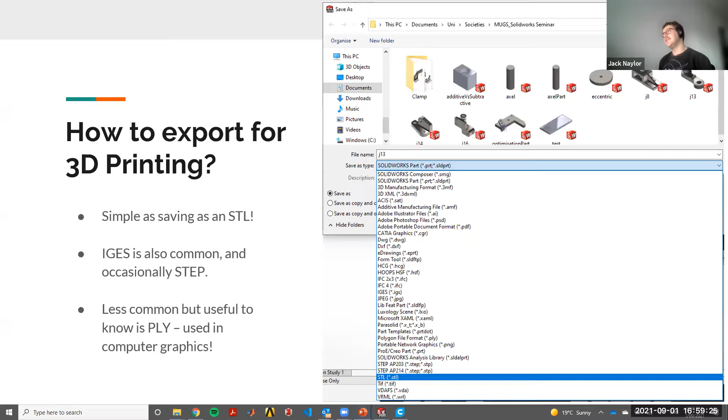So you have that STL file. What do you do with it? Well, there's a thing called Cura. It's a piece of free software. I use it for my 3D printer at home. You basically just drag and drop in your STLs, load in your printer config, and then hit this big blue button down the bottom. And that slices it up into a whole bunch of little slices that you can then send to a 3D printer. And hey presto, you can manufacture parts very, very easily that you've designed in SolidWorks.

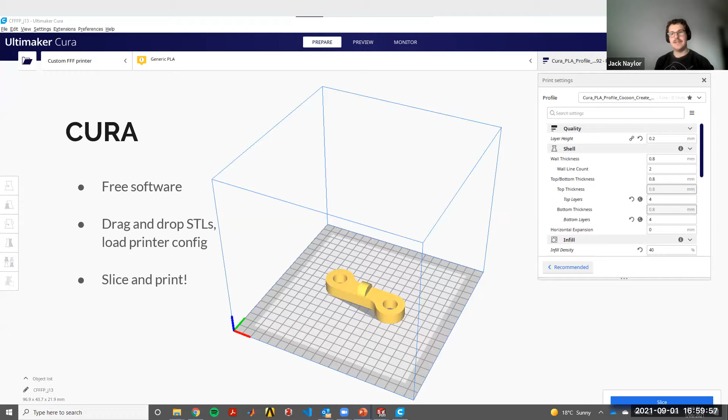This last little part of this seminar is, where do you go next with SolidWorks? Well, SolidWorks is pretty good at what it does, and I hope you guys recognize that now. You're able to successfully take a 2D engineering drawing and transfer that into a 3D part, which you could then send for 3D printing or machining. Knowing this much SolidWorks would probably get you by for the first couple of forays into that space. But it also begins to open doors for you in some other things. So things like simulations, computational fluid dynamics around the outside of structures, topology optimization, like I showed some examples for earlier, and some more complex things like electrical routing and pipe work that is regularly done in industry.

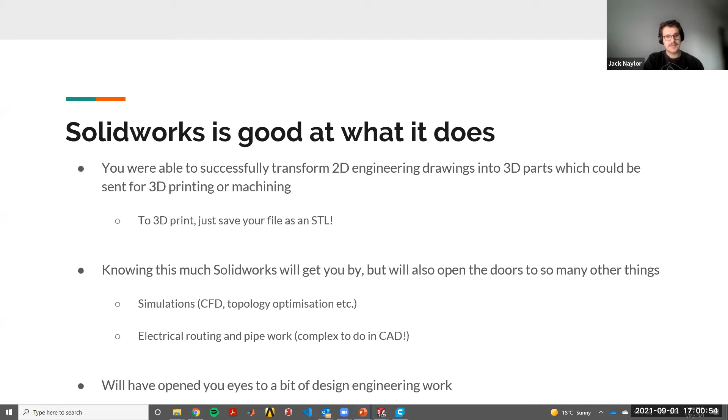And hopefully as well, this has opened your eyes to a bit of design engineering work as well. Something I want you guys to take away is design engineering is not everyone's favorite thing. You don't have to be a design engineer, but I really do think you should be able to communicate designs. Communication's pretty key, and engineers usually like to communicate things visually. So making drawings of parts and then sending that off for manufacture. The best engineers draw to a standard that everyone can understand, and whether they're trying to communicate with other engineers, workmen, or the public, drawings are a pretty good way of doing that.

You also never know when you'll need it. So if you end up owning a 3D printer in the future, being able to actually make your own parts is a pretty useful thing as well. You can fix things around the house if you so wanted to. Some suggestions for you. If you think you're going to use SolidWorks at least once in a blue moon, I do recommend the following: dual monitors. So I've got a big one sitting here in front of me that all your faces are on, and also this one, my main computer screen that I've been SolidWorksing off of. Makes it a hell of a lot easier because you can have your drawing on one and your actual part and assembly on the other.

The other thing is a good mouse. So I've got a Logitech MX Master 2 or whatever, which is a pretty nice and ergonomic design, and being able to click using a mouse is a whole lot easier, as well as being able to scroll in and orbit around parts. And the other thing is either a set of calipers or a micrometer. There's some pictures of them there. The reason I recommend these is, if you have physical objects in the real world and you want to make models of them, you need something to transfer those physical objects into a set of dimensions that you can then enter into SolidWorks to build those models up. And they're also handy to have. You'll probably end up using them in industry anyway.

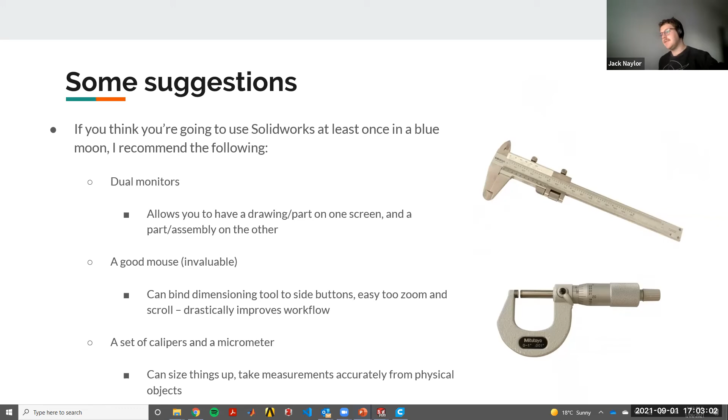So that brings us to the end. Happy to take questions if there are any. Hopefully that was worthwhile. It's given you a bit more of a practical understanding of how to use SolidWorks and some of the quirks of it. In my opinion, there's no point just going through the inbuilt SolidWorks tutorials because you don't actually learn all that much. I think having a bit more of a practical understanding of how it works and how you go about making a part is much more worthwhile. So thanks for coming.